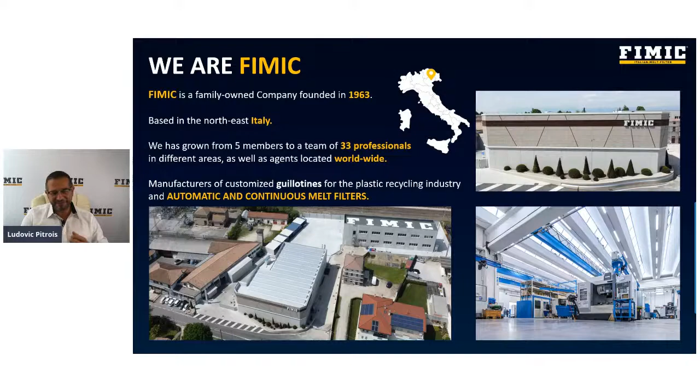FIMIC is a family-owned company based in the suburb of Venice, Italy. Since 1963, FIMIC has been dedicating its effort, research, and results to the plastic recycling industry. Our main products are automatic continuous melt filters and guillotines. Today, we have more than 370 equipment running worldwide. Many units are running at the leading players in the plastic recycling industry. And today, we are very excited as we will share a premier FIMIC product to the world.

We are FIMIC. What does that mean? We are people, a company dedicated to serve the plastic recycling industry. We have a team of 33 professionals, as well as agents in multiple countries to offer closer support to our customers. FIMIC grew 700% the past 6 years.

Plastic recycling has become a very hot topic in recent years. FIMIC has dedicated its business to plastic recycling. Our philosophy is to create the equipment which helps the plastic recyclers to easily upgrade the performance of existing or new recycling lines and to dramatically reduce the operational cost. This short video will explain to better understand FIMIC's line of work. Let me play.

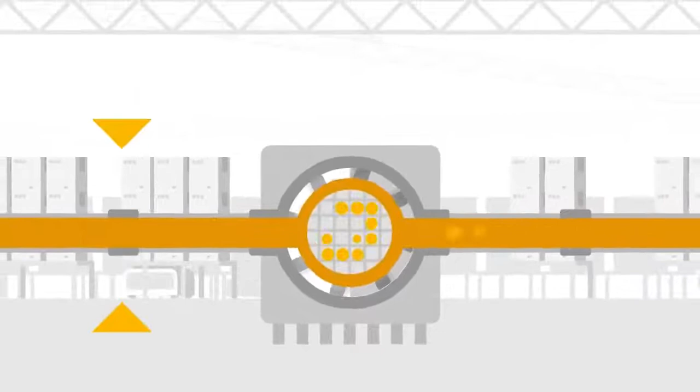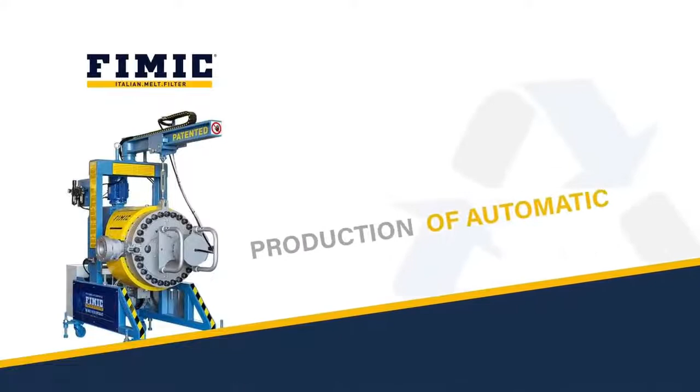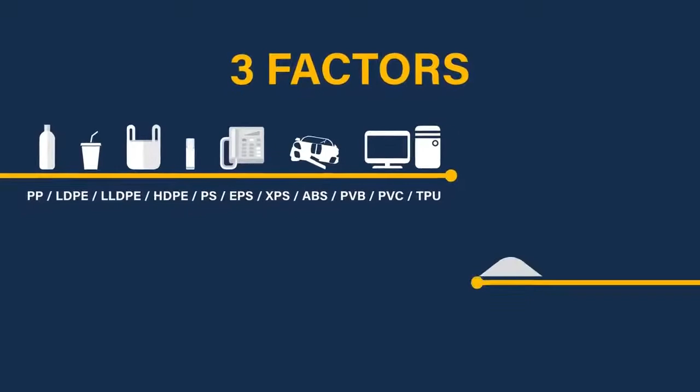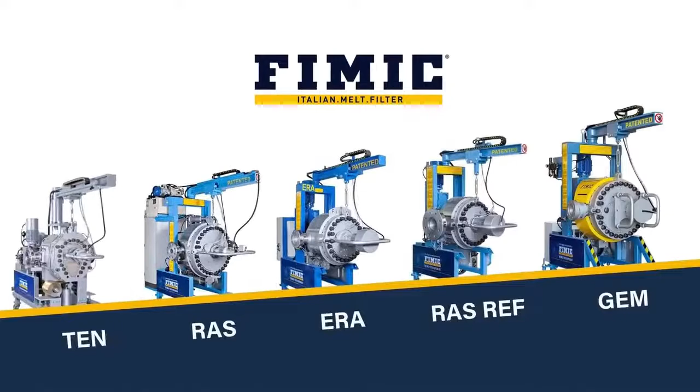Does your company recycle plastics? The European directive is clear. From 2025, plastic products must contain at least 25% recycled material. This is a very high percentage, and it is difficult to achieve, at least with manual or semi-automatic filters. However, it is not a problem. In fact, it represents a great business opportunity if you choose to rely on FIMIC, a company specializing in the production of automatic and self-cleaning melt filters specifically dedicated to post-industrial and post-consumer plastics recycling. Its filtration technologies, one of a kind, guarantee high results and a very high quality of the final material. They are also available in different models and sizes, based on 3 factors: type of material to be recycled, required output per hour, contamination level and filtration requirements. These days, the amount of material to be recycled is ever increasing. At the same time, it is necessary to maintain high standards for high quality results. To do so, FIMIC adapts the technology to the customer's needs with 5 different screen changers, offers all possible filtrations, and covers the many different existing applications. Would you like to test your materials at FIMIC? Book a test in our technical center.

So after this nice short animation video, I would like to talk more about our technology. FIMIC's most famous technology is dedicated to automatic and continuous filtration. We are the only company which provides any type of automatic filters targeting post-industrial and post-consumer plastics. In total, we have a range of 5 different models, from materials with low contamination up to very high or aggressive contamination levels, from smaller output, 660 pounds per hour, up to 13,200 pounds per hour.

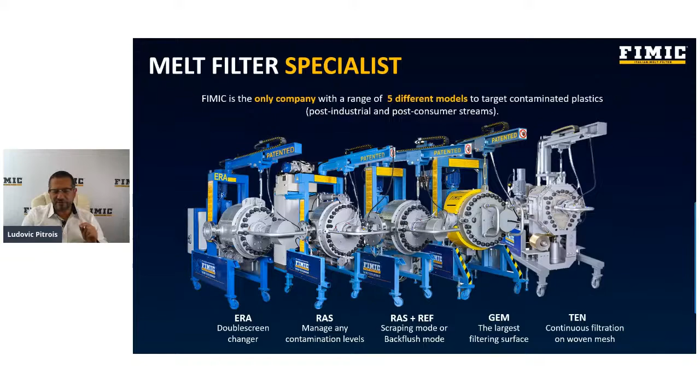Depending, of course, on the material, throughput, and required filtration that our customer needs, we will provide the most suitable filter solution accordingly. Last but not least, our technology is the only continuous scraping system also applicable to PVC recycling.

For the automatic filter, our philosophy is to provide the right type and size of filter, considering our customers' technical specifications. We can work with all different types of materials, contaminations, and our filter can be installed on any extruder types and brands, existing or new.

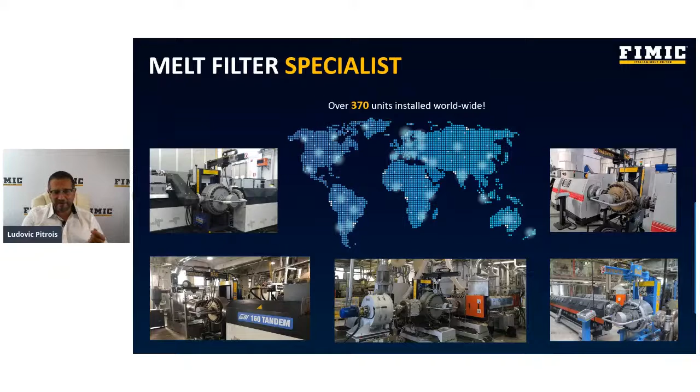We offer many years of experience and can provide customers excellent know-how based on real facts and experience, not only theories. And in addition to our popular automatic filter, to improve plastic recycling, we are proud to introduce our new innovation today. It is a revolutionary, innovative technology, a real breakthrough solution for the plastic recycling process.

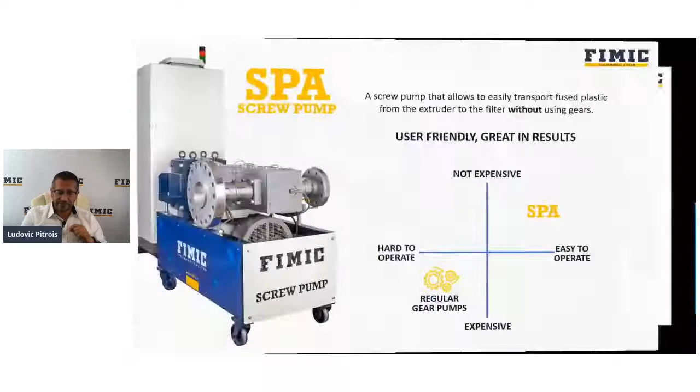Let me introduce you to the SPA screw pump. SPA means screw pump automatic. It is designed for 2 main purposes. First, it is designed for plastic recyclers and compounders who want to optimize the output performance of their extruders. Second, in case a recycler or compounder needs 2-step filtration, the SPA will transport the material from the first filter to the second. The SPA screw pump is, in few words, a melt pump used for the plastic recycling process.

The SPA screw pump allows to easily transport plastic melts from the extruder to the filter or between 2 filters without using gears. It is user-friendly and gives great results. Very briefly, the advantages of the FIMIC screw pump are shown here on this chart. Compared to conventional gear pumps, the maintenance cost of the screw pump is very low, as well as the ease of operation, which is fundamental to consider in the recycling line or compounding line using recycled plastic.

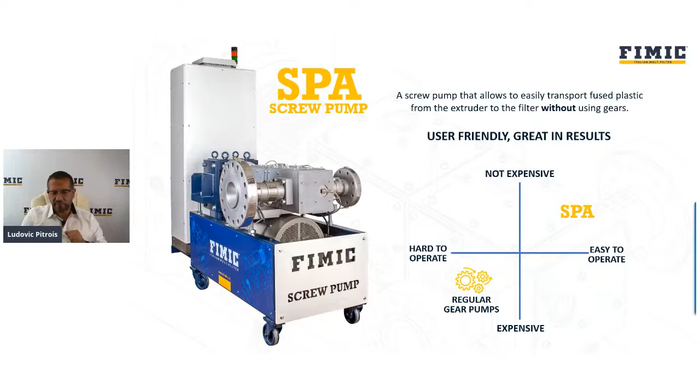Being more sensitive to contamination, a gear pump often needs a manual slide plate filter installed before it to protect it. FIMIC SPA is using the screw to transport the melt. The screw is less sensitive than gears, so it doesn't need any additional filter before it to protect it. That is why its best performance comes out when using recycled plastic, especially post-consumer. So once again, the overall operation costs for a screw pump are much lower compared to gear pumps.

Regular gear pumps are complex to operate, while the SPA is easy to use, and does not require periodic replacement by the operators. It can be installed either before and or after the filter and will be perfect for applications requiring a double filtration step or for compounding lines, typically on twin screws, to help build up enough pressure to the filter.

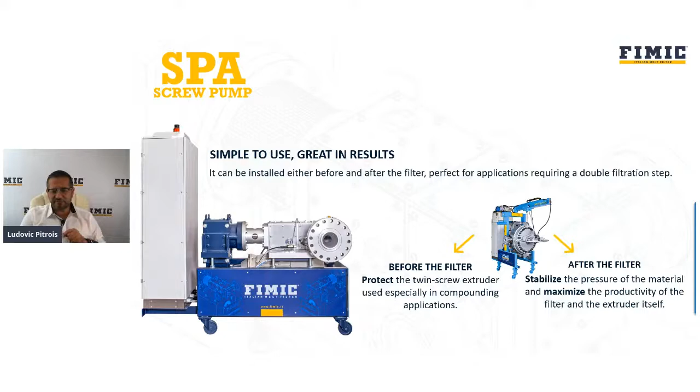There are two main applications for the FIMIC SPA screw pump. Before the filter, typically on twin screw extruders, to build up enough pressure to the filter without the risk of damaging gears or replacing them too often. Or after the filter, either in between two melt filters or to stabilize the pressure of the material and maximize the productivity of the filter and consequently of the extruder itself.

To sum up the advantages of the SPA screw pump for plastic recycling: ease of operation. The screw's lifetime is much longer compared to gears. Additionally, it's easy to replace. The touchscreen has 3 operation modes, easy to change and test depending on the material and its characteristics.

Extremely low maintenance requirements, significant savings even in the short term, longer lifetime of wear parts, taking into consideration that recycling always has contamination that will damage gears during the operation, and which will need to be replaced multiple times. This will not happen with the SPA screw pump. Optimization of the extrusion performance. The screw pump can reduce the pressure from the extruder, hence bring the extruder's output to its maximum, either if it's installed before or after the filter.

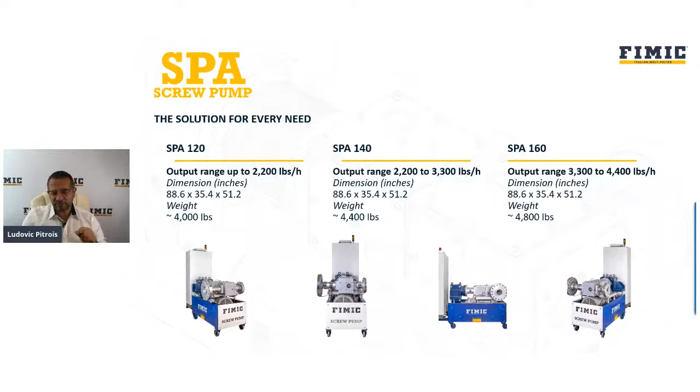However, we also understand that many of you are working with higher output, so our R&D is already working on designing a larger one to reach higher throughput requirements. Now, I will share with you a successful installation case involving the SPA screw pump.

You will be able to see real examples of customer lines equipped with a FIMIC melt filter and a screw pump. The first was installed on a twin screw recycling line equipped with a SPA 140 for an output of 2,200 up to 3,300 pounds per hour, right before a FIMIC TEN filter. This is a single-step filtration.

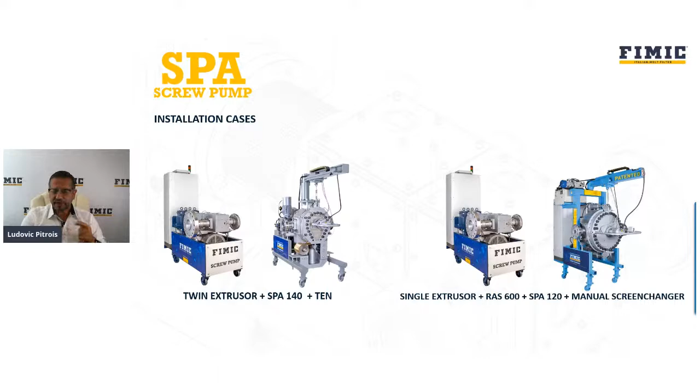The TEN filter produced by FIMIC is using the continuous belt type screen. The TEN filter is normally used for filtration of low contaminated plastic, less than 1% contamination. The second case is a single extruder equipped with a FIMIC RAS 600 melt filter, a SPA 120, output up to 2,200 pounds per hour, and followed by a manual slide plate type screen changer as a second filtration step.

This project involved washed post-consumer PP regrinds, mainly from battery automotive application. We got a co-rotating twin screw extruder, followed by a FIMIC SPA 140 screw pump and a FIMIC TEN filter, which is using a continuous woven mesh belt screen. The output for this line is 2,200 up to 3,300 pounds per hour, as I mentioned.

Usually, a twin screw extruder has pressure limitations, and the most common issue will be the melt return from degassing ports. Installing the new screw pumps helps increase the pressure of the extruder and avoid melt returning back out of the degassing zone. We can find the configuration in the picture shown below. It is a twin screw extruder, FIMIC screw pump, and a FIMIC TEN filter. As you can see, no need for pre-filtration before the screw pump.

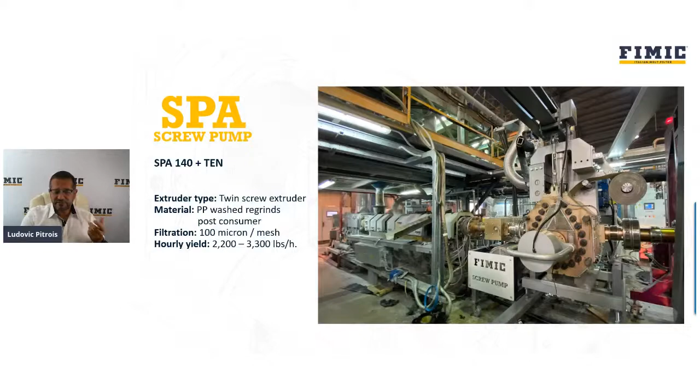Conventional gear pumps need a pre-filter with 400 and maybe 500 micron screen to protect its gears from contamination. And this pre-filter must be changed once every 20 to 30 minutes and potentially more often depending on the type of contamination. But FIMIC screw pump doesn't need a pre-filter, which means less investment, less power consumption, less manpower, and ease of operation.

If you look at the picture on the left, you will be able to see the screw pump. The twin screw extruder is at the very left and is transporting the material into the SPA screw pump. Twin screw extruders are very often limited by pressure, as already mentioned. If the pressure at the extruder outlet is too high, the plastic melt will go back to the extruder and come out from the degassing zone.

The SPA screw pump reduces the pressure at the outlet of the extruder and increases it again at the entrance of the melt filter. In this way, the melt return situation is not happening, and the full potential of the extruder's output can be exploited. On the picture on the right, you can see the installation of a SPA before the FIMIC TEN filter.

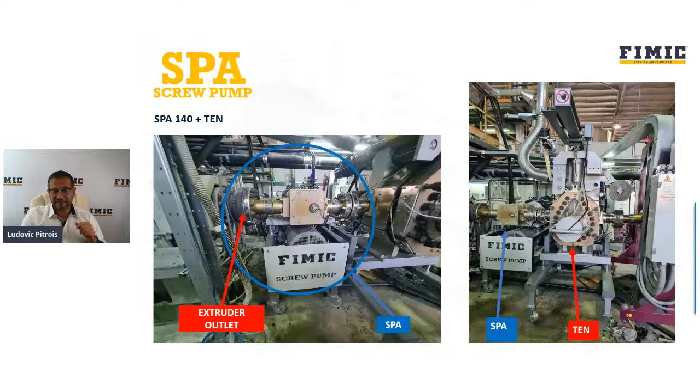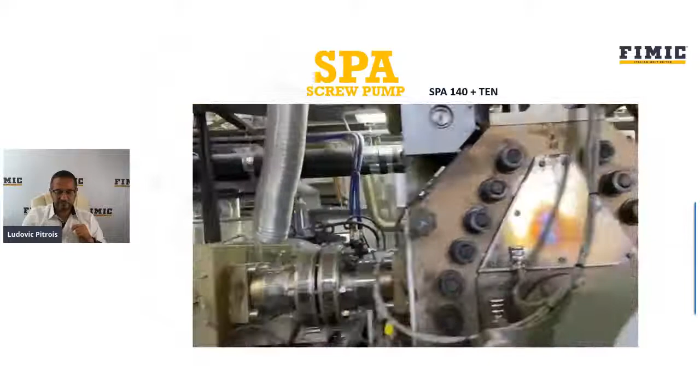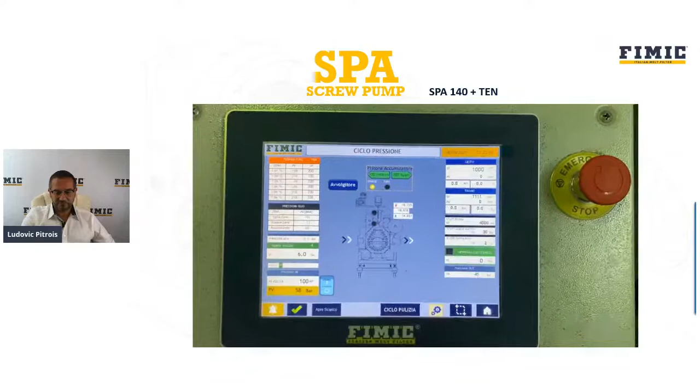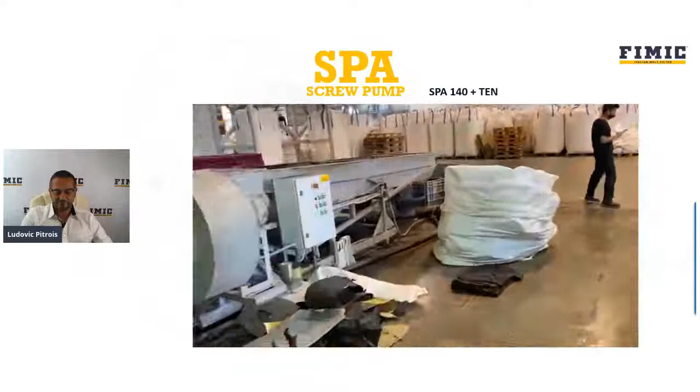Let's have a quick look at the equipment running on site. Here is the SPA. This is the TEN filter. And of course, this is the final result with the pellets.

The second installation case is dedicated to washed post-consumer LDPE films. As this customer's target was to reduce gel formation in the output pellets, we proposed to install a screw pump and a manual filter after the FIMIC RAS 600. The machine configuration is a single screw extruder, first stage filtration RAS 600, and then the screw pump SPA 120, and after the screw pump, a manual side plate melt filter.

The first stage filter RAS 600 has a filtration of 120 micron on laser screen. The second manual filter is filtering at 100 micron on mesh screen. The SPA screw pump here is used between two filters to transport the melt from the first filter to the second filter with an excellent pressure control. The output for this line is 1,980 up to 2,420 pounds per hour.

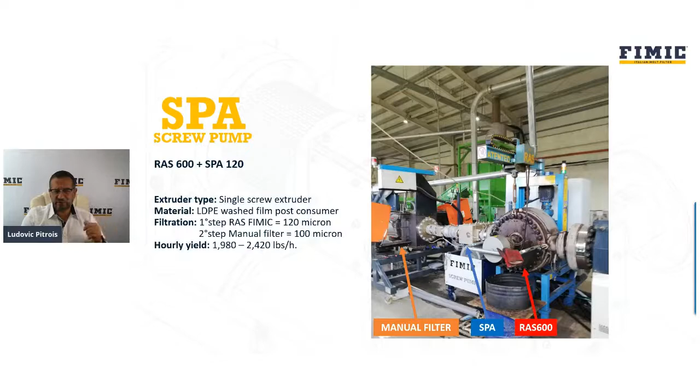Here are some more details of this installation. At the top right-hand side, you may see the SPA screw pump installed after the RAS 600 filter. Here's another operation video that you can see from the customer side.

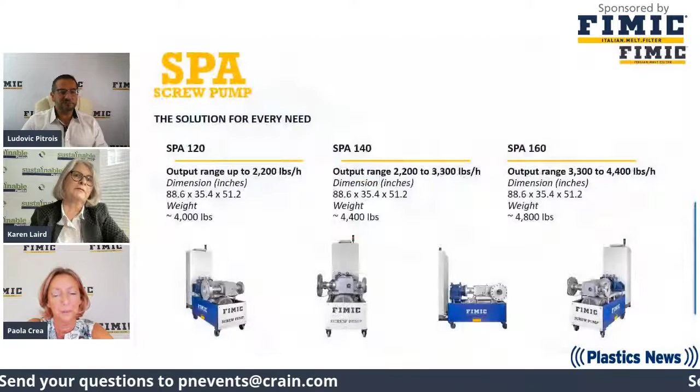Okay. And could you just very briefly go back to the FIMIC SPA and sum up the differences compared to a conventional melt pump? Let me go back to the slide. I don't know if you're going to be able to see it. Okay, cool. Do you see the slide? Here we go. Perfect. Yes.

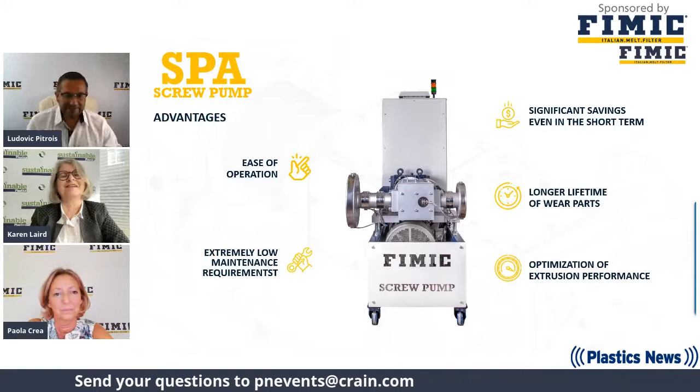Okay. So again, to sum up the advantages of the SPA: very easy to operate. The screw lifetime is much longer compared to gears, and we explained why. Additionally, it's very easy to replace if it has to be replaced. We have on the touchscreen 3 different operation modes, easy to change and test. And we can set different types of material for that particular SPA. Extremely low maintenance requirements, and significant savings in the short term.

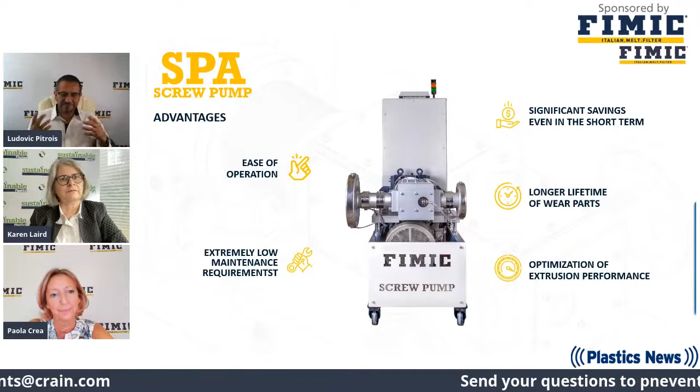Longer lifetime for wear parts, taking into consideration that recycling always has contamination that will damage the gears. And these gears will have to be replaced, sometimes multiple times. And if I can add something. Go ahead. The gear pump maintenance is very complicated. The maintenance is due because the gears are worn. So to access the gears, you have to take the machine out of the line, and then you have to open the machine completely and check every single gear. So it's a complicated and long operation.

In our case, the screw is easy to take out. I'm saying easy, but it will take like half a day, basically. And you don't need to take the machine out of the line, which makes a great difference. Okay, so less business disruption, a lot more convenience. Much more convenient, definitely. And of course, we cannot forget the optimization of the extrusion performance. That's one of the main things as well. Absolutely.